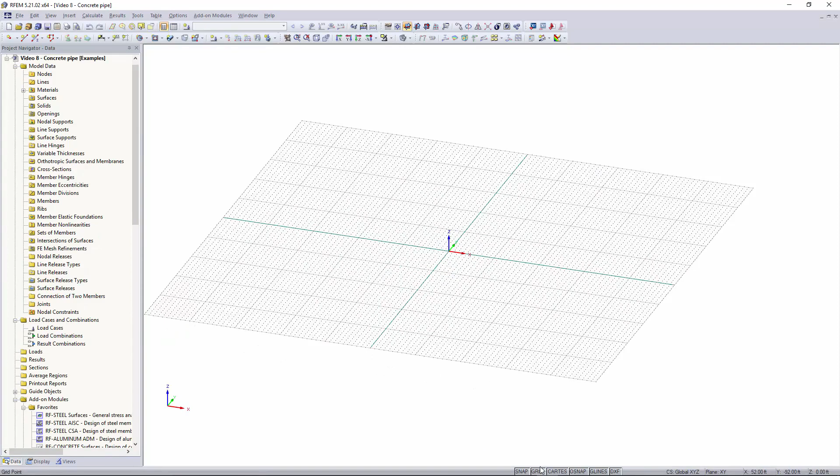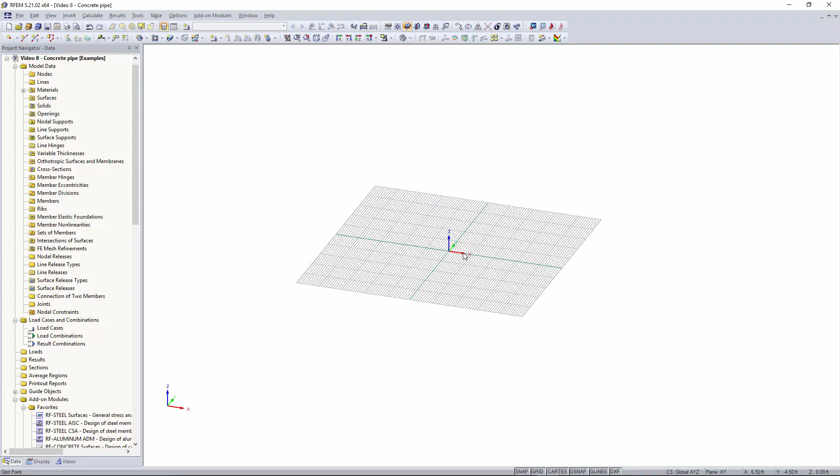Now you'll see that our graphical windows popped up with our grid. The first thing I want to do for this model is edit the grid spacing. I'm going to right click on grid, hit the edit button, and you'll see this window pop up where you can edit your grid spacing and also the amount of grid points in each direction. I'm going to change my grid spacing to 1/2 foot, and now you can see that it's changed within the graphical window.

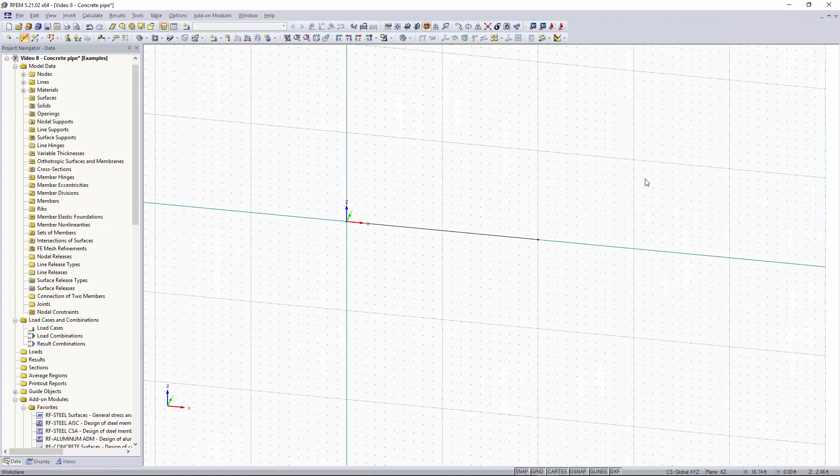I want to go up here and change my work plane. We're going to set it to the XZ plane. I'm going to draw a line element, and this is going to be the center line for our concrete pipe. I'm going to make it 10 feet. Right click to cancel out of it, and now you can see we have our line along the global X direction.

Now I can go up to this tool up here. You should have a drop down window where you can select which types of surfaces you want to create, and you can see we have a surface tool called pipe. This allows you to create a pipe super easy.

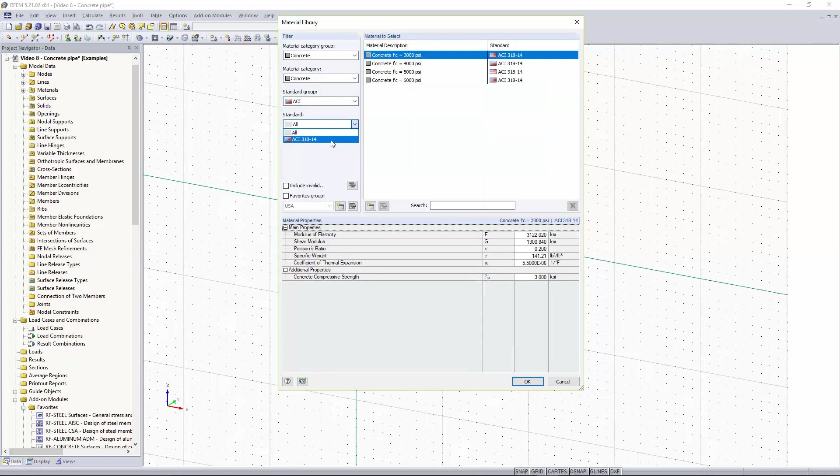The material we're going to set, go to import, and we want concrete, set it to the ACI standard, and then ACI 318, pick 4000 psi. We want the thickness of our pipe to be 4 inches, and then within this tab we can set the radius of our pipe, and we'll set that to about 1 foot.

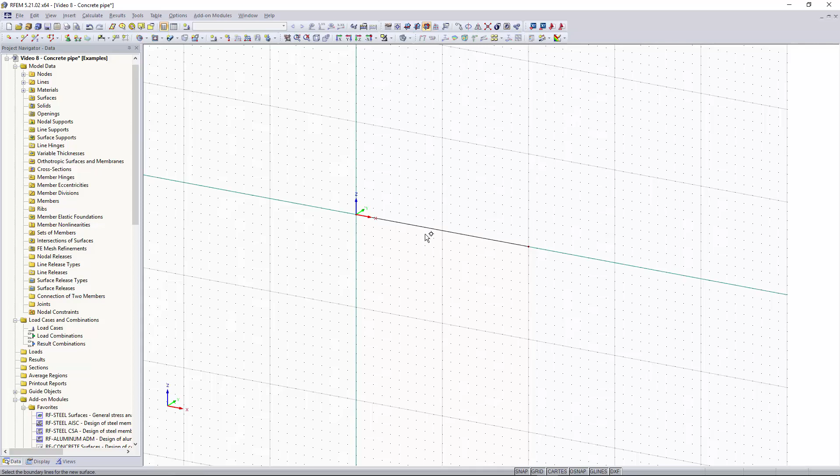Now you can see our cursor has a box next to it. That means we can select which center line we want this pipe to be created on. We'll click the 10-foot one, right click and cancel out of that, and now you can see we have our pipe.

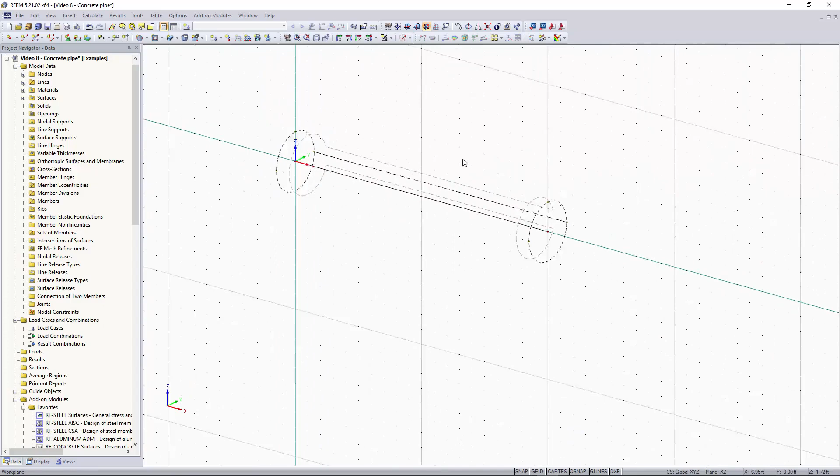So basically our pipe is made out of this one 2D surface just wrapped around that center line. You can see what this looks like and how it is defined just based on a wireframe view.

And then we'll move on to how to divide this pipe into multiple surfaces for calculation purposes. I'm going to drag from right to left, highlight the pipe, right click on it, go to surface, and go to split surface. You'll see that the split surface window pops up. It's taken our surface and divided it based on 3 different cross sections, and you can see we have 4 different quadrants based on this.

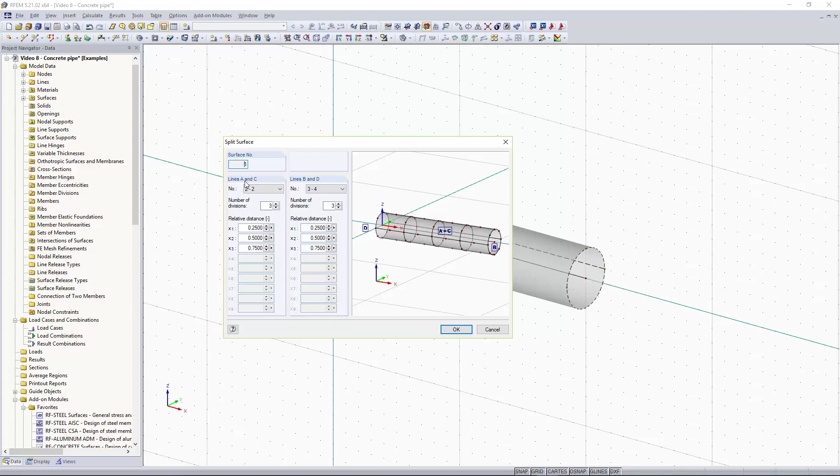I'm going to keep all of this the same. You can see right here you can change your number of divisions for lines A and C and lines B and D. I'm going to click OK, and now you can see that those section lines have been applied and we have multiple surfaces defined.

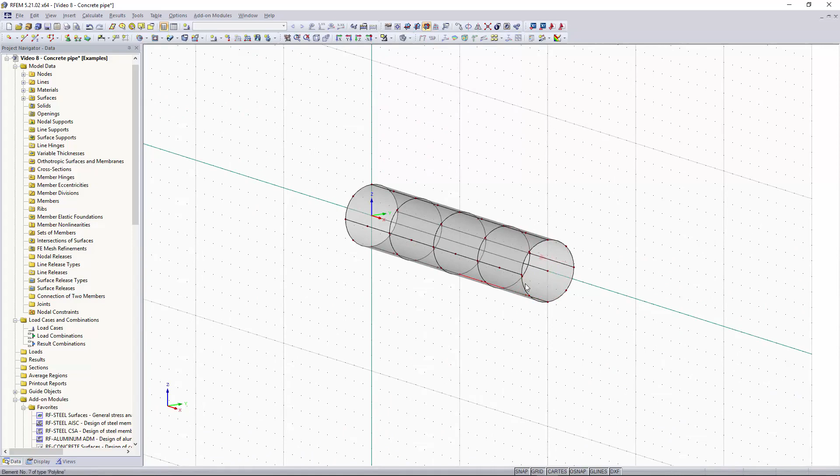Now I'm going to go back and add Nodal Supports to this left side, and I want to add a rigid surface to this right side so that we can apply our loads to it. So I'm going to change my work plane up here to the ZY plane. We can easily go up to New Nodal Support, and I'm going to keep this as hinged.

Click OK, and now I can rotate and drag from left to right, select those end nodes like so, and then delete this middle node, Nodal Support.

Now we want to apply a point load and moment load to the front of this pipe. So I'm going to change my work plane origin by going up to this tool up here, set origin of grid / work plane, and I'm going to set that to the center point.

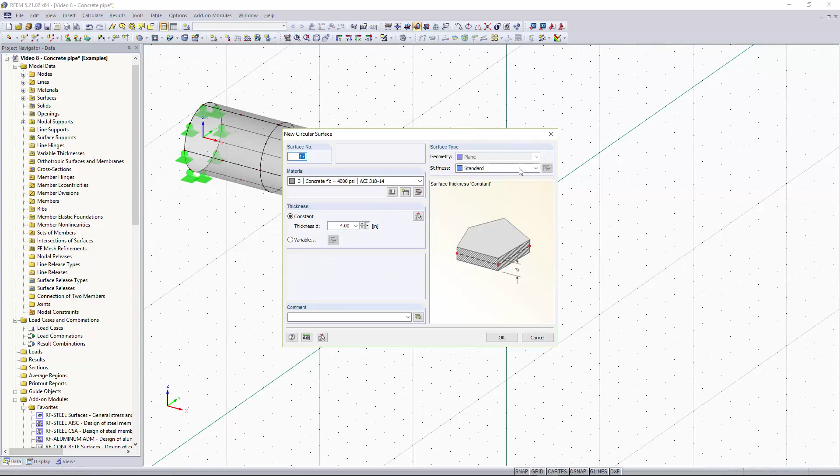Now I want to create a rigid surface, a circular one, so I can go up to this tool up here, hit the drop down button, hit circular, and right here we can set our stiffness to rigid. This creates an infinitely rigid surface. I'm going to click OK.

And now we can apply that to the end of our pipe. And there you go. Now you can see that our rigid surface is this pink color, and it differs from the gray color of our concrete.

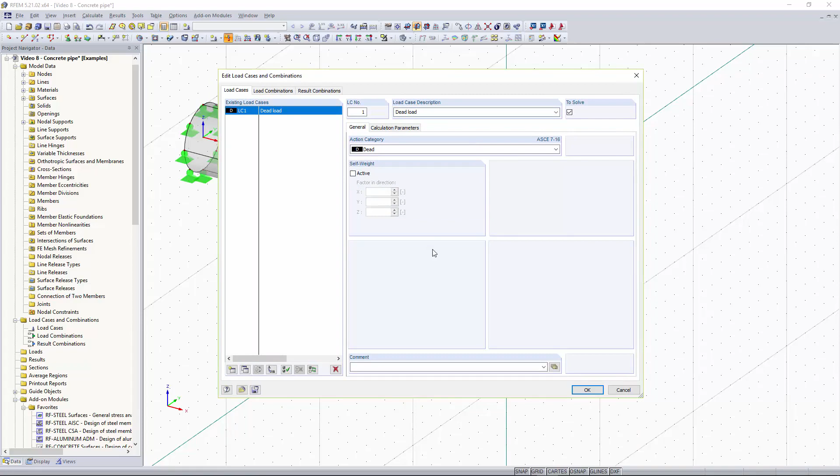Now I want to add those point loads and moment loads. So I'm going to go up here and click on point load. We haven't created a load case yet, so it's asking us to create one. I'm going to create a dead load case and just turn active self-weight off with this checkbox. I'll click OK, and then automatically our new nodal load window will pop up.

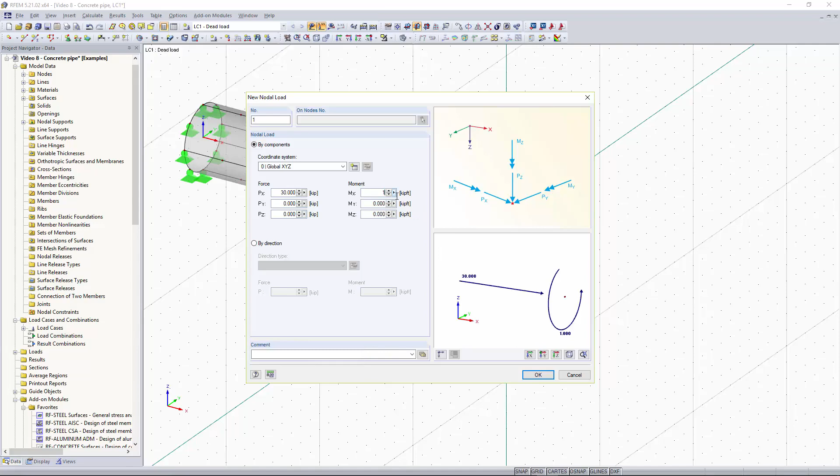I want this nodal load or point load to be pulling the pipe in tension, so I'm going to set it to the positive X direction and make that 30 kips. Then I want a moment force or torsional force at the end of our pipe about the X axis, so I'll set that to 15 kip feet. I'll click OK, and now you can see we have a little icon next to our cursor, and I click on this last node on our rigid surface.

Now you see that our loading has been applied to the end of the pipe. Now that we have our loading and our supports added to our model, we can go up here and click Calculate All.

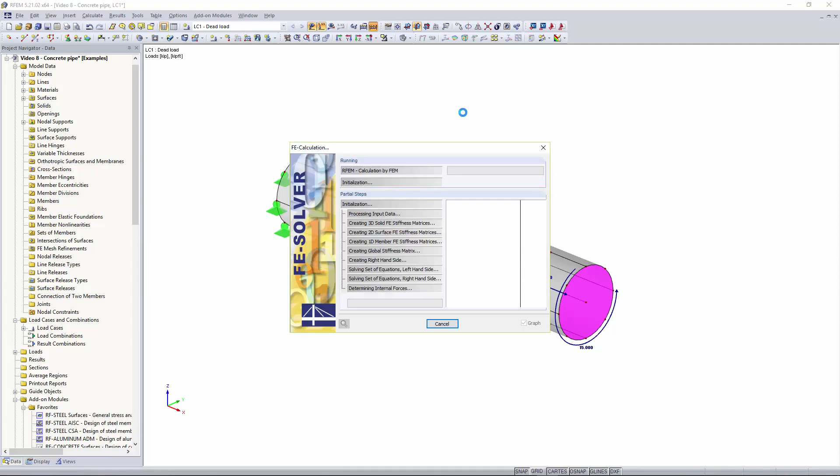Now you see that our global deformations are shown, and you might be wondering why our circular pipe looks more like a hexagon. That's something I'll get into a little bit later. The max global deformations are shown on the pipe, and over here we can change our results to surfaces, which will show basic internal forces such as moment about the X and Y directions, shear, and axial forces.

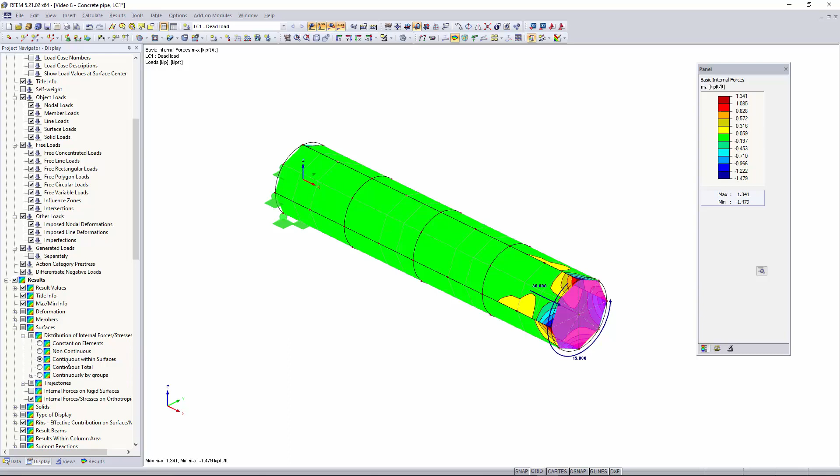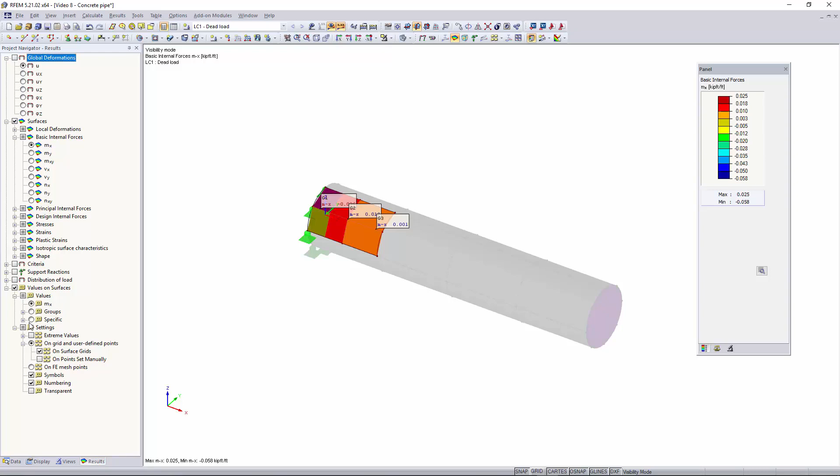Now we can move on to checking out the results. Right now we have our surface results turned on along with basic internal forces, and I want to concentrate on this one panel. I can go to this dropdown and hit visibility by selected objects, then turn on values on surface. Right now I just have moments within the X axis direction turned on, so I want to go down here and turn off extreme values.

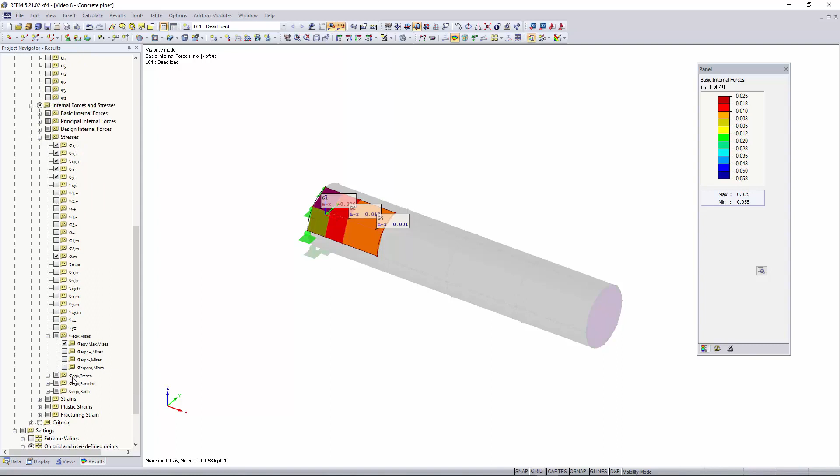I more specifically want internal forces and stresses turned on. Under stresses, we can turn on sigma x and y on the positive side of the surface, our torsional forces on the positive xy side, along with sigma x and sigma y on the negative side of the surface. We can also turn on alpha sub m values, which give us the angle between the local x-axis and the principal axes. And then we can turn on max stresses from our von Mises calculation, as you can see displayed on our surface. We also want to make sure our specific tree is checked on.

Now with extreme values turned off and symbols and numbering turned on, we get these results at each of these points, and you can see that all of our stresses and torsional moments are shown.

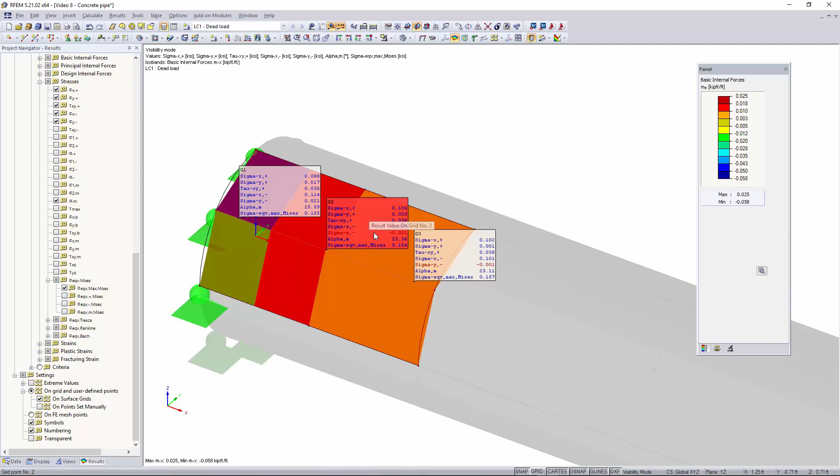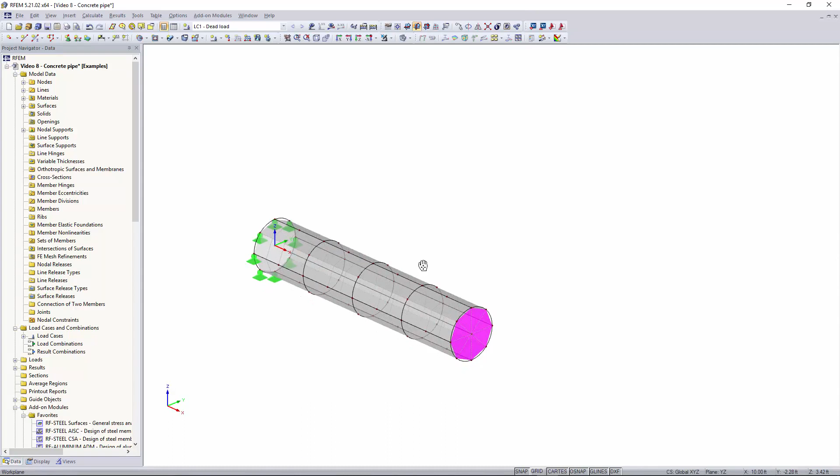Now I want to cancel out this visibility and turn off our results for a minute. I want to show you how to determine whether or not your finite element mesh is the right length. I'm going to highlight this whole model, go up to our move and copy tool, make a copy of this model, and move it 10 feet in the Y direction.

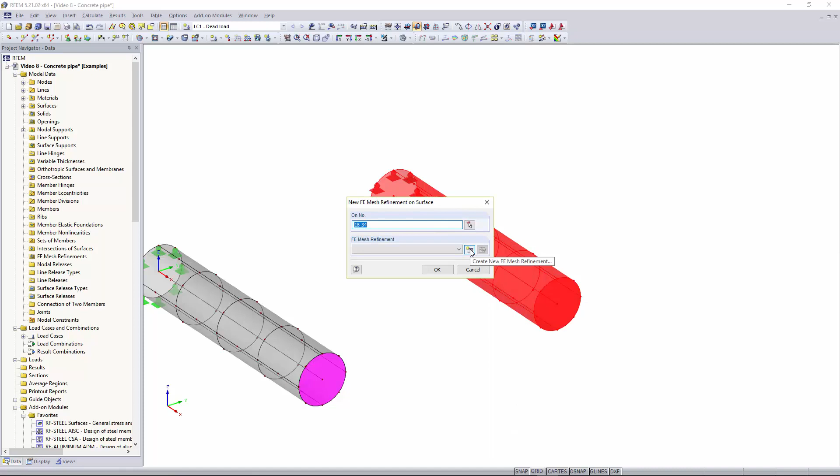What I'm going to do is add a finite element mesh to this entire model by highlighting the whole model, right-clicking, going to surface, and then into FE mesh refinement. We're going to hit new, create a new FE mesh refinement for the entire surface, and we want the target FE length to be 0.2 feet. We'll hit OK again, and now you'll see these little box symbols telling you this surface has an FE mesh refinement on it.

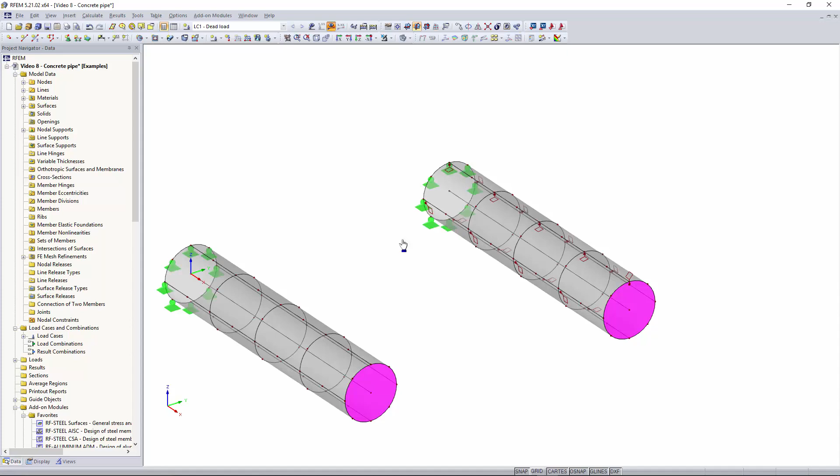Now we can calculate our results again. Once generated, you can see how much finer and better our model looks with the smaller FE mesh. We had a 1 foot FE mesh on this model, and on this model we have a 0.2 foot FE mesh length. As you can see, that gives us a more accurate representation compared to the more blocky FE mesh over on this side.

So now let's view the results. Once we go under values and surfaces and turn on specific results, we can compare the results between these two models and see how much they differ. I'm just going to select one of these panels again.

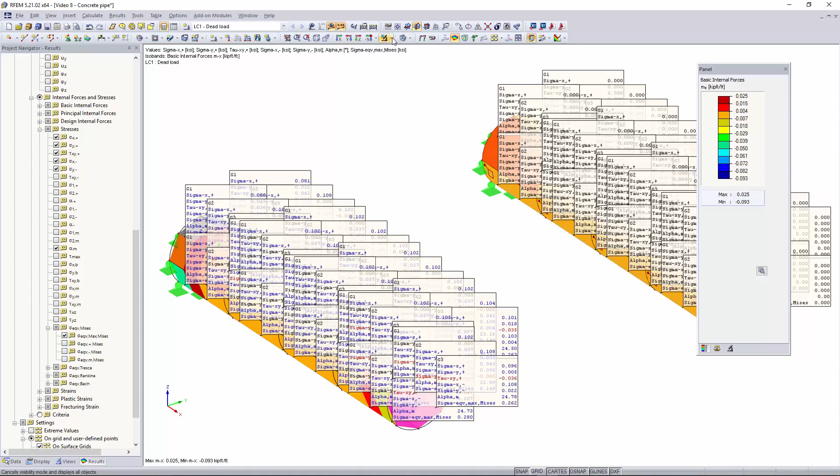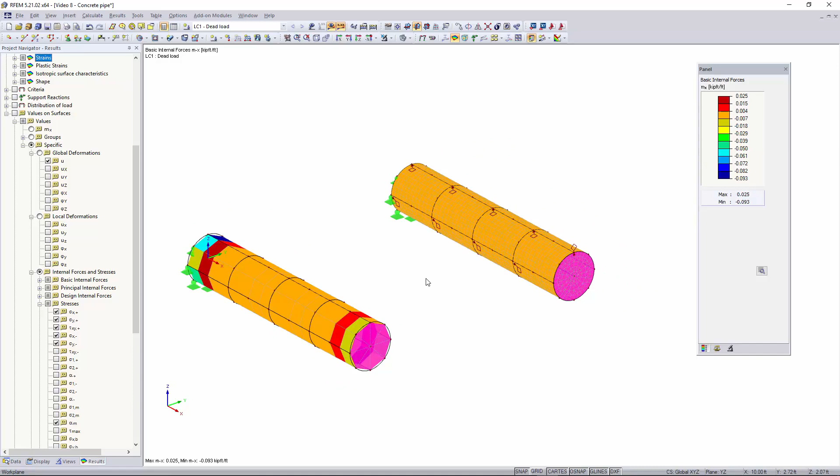This is just a reminder when unsure about how large you should make your FE mesh - it all depends on the size of your model and the size of your surfaces. But if you change your FE mesh from one length to another and the results differ by a lot, that means your FE mesh probably wasn't the right size. If you'd like to change the FE mesh of the entire model, you can always go up to Calculate, FE mesh settings, and change your FE length right there, which will change the FE length of the whole entire model.